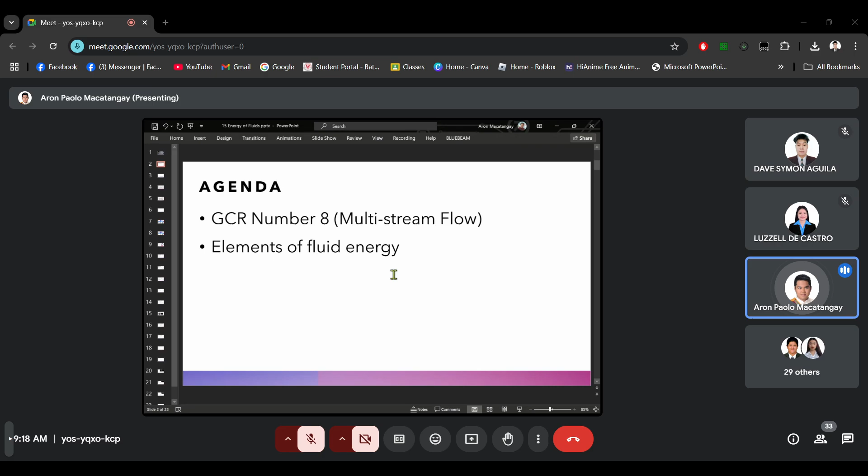So for now, GCR number 8, the multi-stream flow seat work, is one inlet, two outlets. It's a theoretical problem because, instead of a mixer, it acts as a separator. I have a fluid entering the chamber, then ideally the chamber will separate the fluid into two streams that have different properties. In reality, this is very difficult, almost impossible. But in theory, we just want to see how to solve problems of this style. I think in your quiz number 3, number 5, I asked you for feedback.

And one feedback that caught me is that they want to have examples that are the same level as exam questions. So this is one adjustment to that. I want to try giving you a little bit more advanced examples so that you can feel how to solve them and you will not get culture shock or exam shock when the final exam comes out, because they are relatively in the same level of difficulty. Okay,

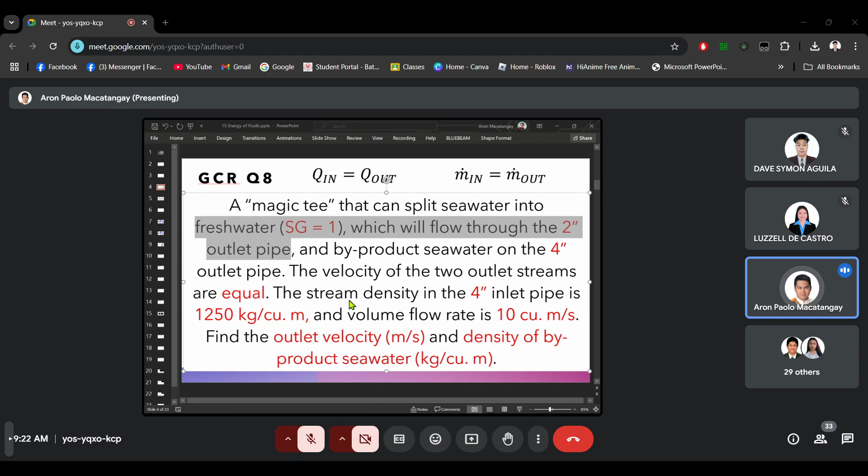And the problem states that the fresh water will flow through the 2-inch outlet pipe. It means that your fresh water will come to this side, to this end. So let us label this so you will not get confused. Fresh water. So the outlet pipes are 2-inch and 4-inch. The problem states that fresh water will come out of the 2-inch outlet.

It means that the other outlet pipe will release seawater also. But of course the density is different, because there is already a split in the fluid flow, so the properties of the two flows are different now. So there it is. Fresh water SG equals 1.

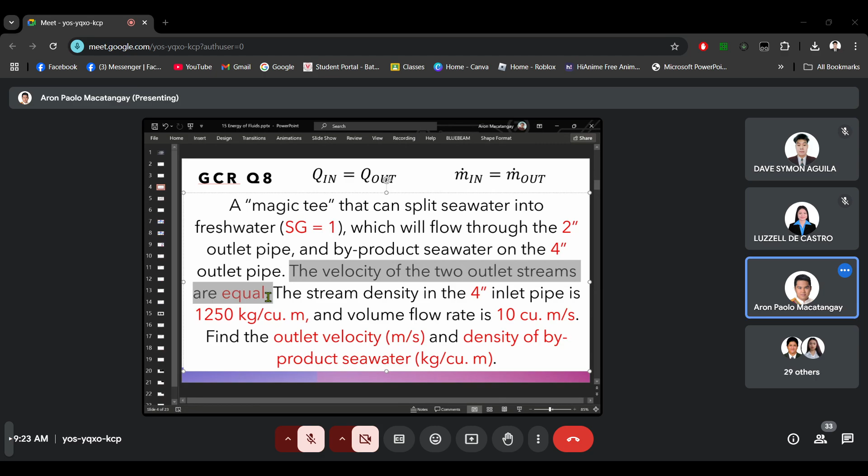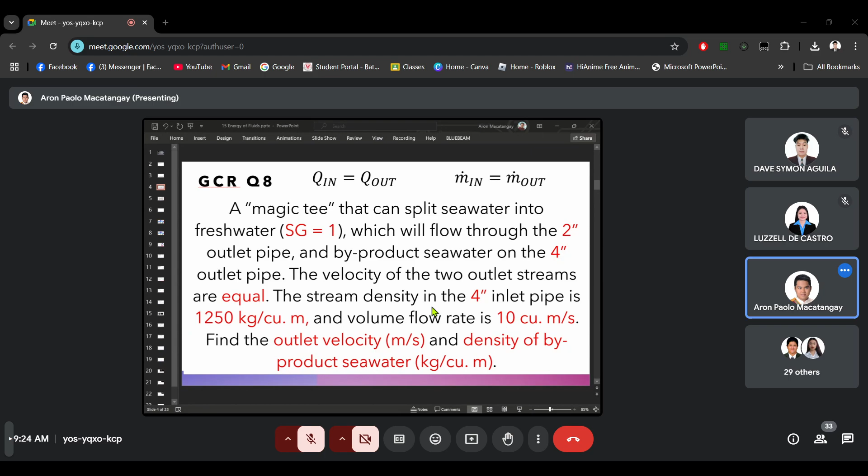And then it also stated that the velocity of the two outlet streams are equal. So V2 equals V3 is placed here to remind you that the velocity of outlet 2 and the velocity of outlet 3 are equal. You're asked to, let me copy this so you will remember. Find the outlet velocity in meters per second and the density of byproduct seawater, meaning the one coming out of T3, in kilogram per cubic meter.

So you can refer to the slides last week that are already uploaded on the classroom. And remember that the key here is the conservation of mass equations. Q in equals Q out and mass flow in equals mass flow out. This is Q, volume flow rate in equals volume flow rate out. Total.

So you have 15 minutes to do this seatwork to exercise your knowledge in multi-stream problems, because in the final exam most likely one problem will be a multi-stream problem. So I hope you get comfortable with solving problems like this.

So it's 9:26. I will have until 9:45 before we go on to the next topic, and then we will discuss the solution to this tomorrow during our face to face. If you have questions, then just raise your hand. I'll just be here in the background.

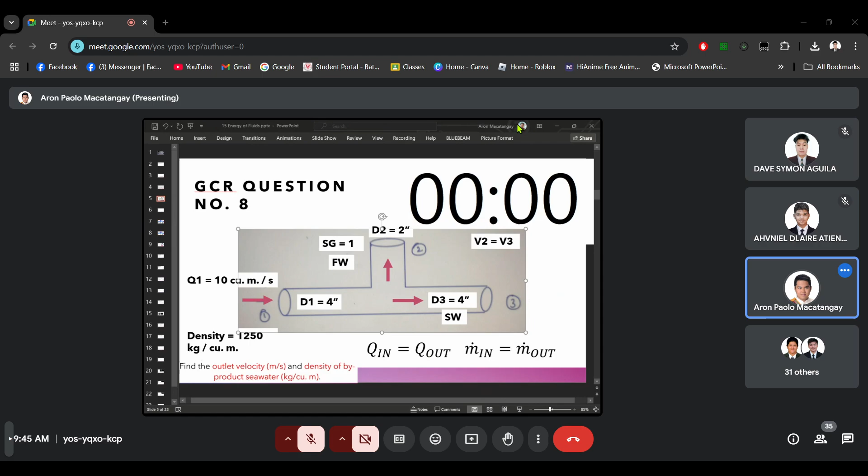The timer here is 0 already, but you can upload to the GCR until 9:45. Okay, so I think time's up. Hopefully most of you were able to solve that, but tomorrow we will discuss it in class, face-to-face. But for now, let's move on to our next topic, which is the energy of fluids.

Remember when we started the sem, I showed you this diagram, the different branches of fluid mechanics. First is fluid statics. That is your rho g h, everything rho g h. That was discussed from day one to midterms. And then I said that fluid kinematics and fluid dynamics will be discussed midterm onwards.

For the past two meetings, we discussed fluid kinematics, which is the study of fluids in motion considering geometry only. So this is your area times velocity, density times area times velocity, and density times gravity times area times velocity: your volume flow rate, mass flow rate, and weight flow rate. All of those consider geometry only and no consideration of energy.

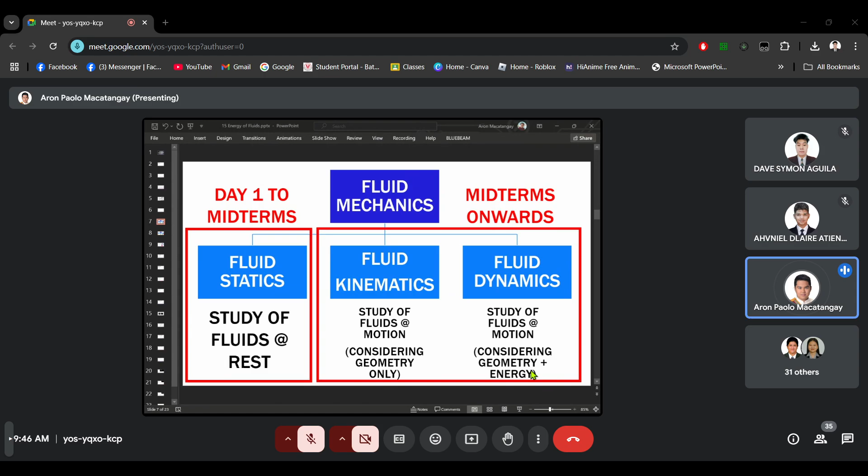Moving forward, we are now in the last category, which is fluid dynamics, the study of fluids in motion considering geometry plus energy. Theoretically, we are done with fluid statics and fluid kinematics. But tomorrow in our face-to-face, we will still discuss problems about fluid kinematics, more hands-on, seat work and group work, just to give you more examples.

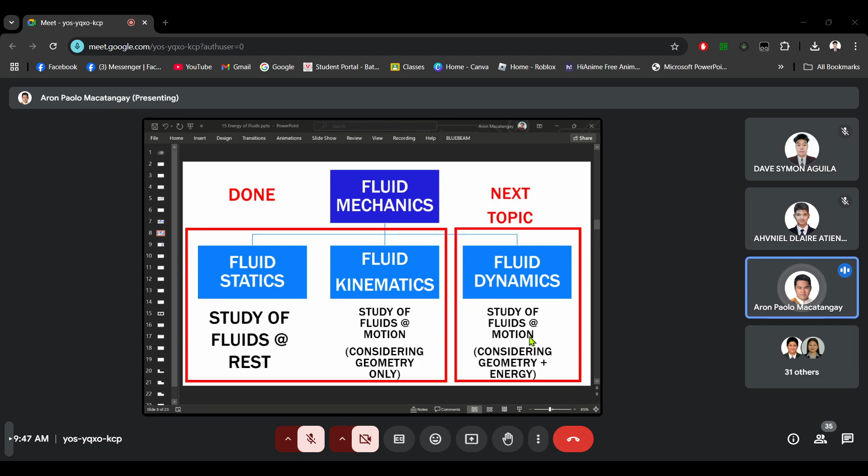But topic-wise, we're already on the last part, fluid dynamics. So we will now consider energy in our discussion of fluids in motion. Let's start with energy. Energy in fluid is in the form of mechanical energy, which can be converted to mechanical work completely. Mechanical work means you can use this energy to make objects move, so you can push or pull objects using fluid, or you can

make objects rotate. Next week we will discuss more of those types of machines and how fluids can convert energy to mechanical energy. But for today, we would like to focus more on the energy itself. What composes the energy of fluids?

The energy of fluids is composed of two types, the potential energy and the kinetic energy of the fluid. The potential energy involves the elevation energy and the pressure energy. These are potential because these energies are not due to moving particles. Elevation energy is based on elevation and pressure energy is based on pressure. These are properties of the fluid that do not necessarily mean it is flowing.

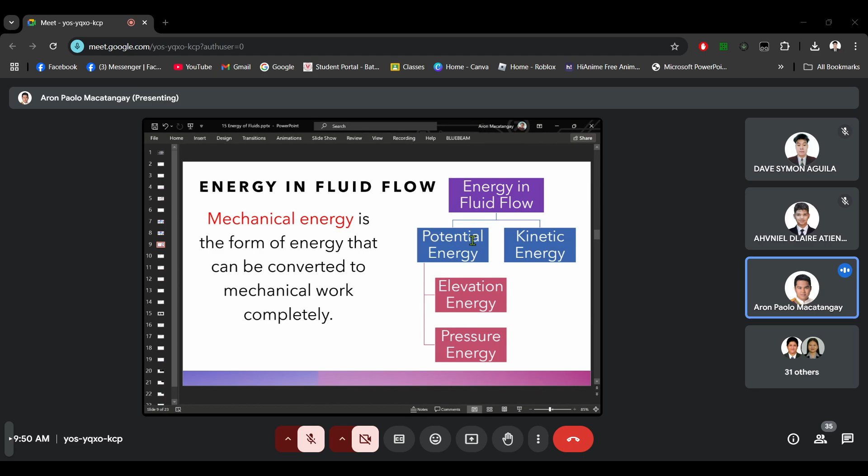Okay. So let's start with the potential energy part. The energy that is present in the fluid if it is in motion or even if it is not in motion. So the first component is the pressure energy. For fluids, this is the energy that has the ability to do work by virtue of the difference in pressure between 2 points. So remember, mechanical energy is related to actual motion, motion of machines, motion of parts. So pressure energy can actually cause mechanical parts to move because of the pressure.

Okay, so papaano yan? For example, if you have a sealed tank and you increase the pressure inside, you can actually cause the tank to explode. And that explosion will cause failure or damage to the physical material of the tank, and that damage is actually mechanical energy at work, because you can think that there is movement in the tank as it bursts open or as it becomes damaged.

It's also pressure in a balloon. If you have a small rubber balloon and you blow air into it, you increase the amount of air inside, you increase the force on the inside of the balloon that causes it to expand. And that expansion is actually movement already because of the pressure difference inside and outside the balloon. So the higher the pressure inside, the more push or force that the pressure is exerting on the balloon, causing it to expand. So that is due to pressure energy alone.

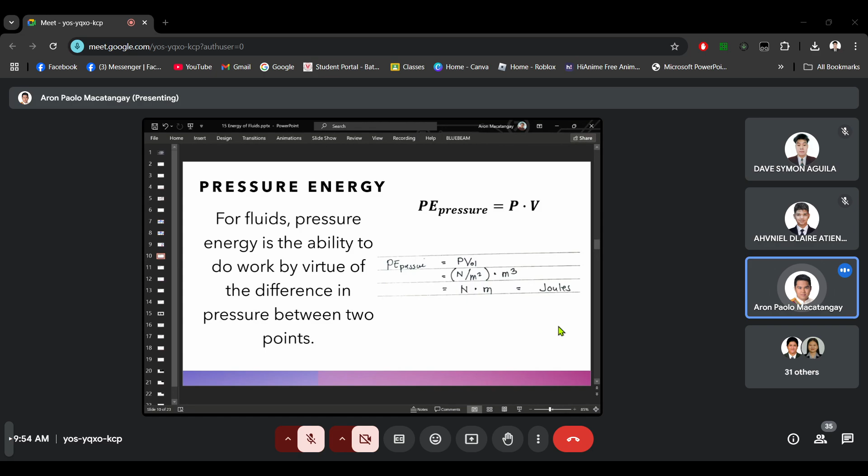Okay. Next naman, the kinetic energy. The kinetic energy is based on the fluid's ability to do work by virtue of its velocity. So yan yung pressure washer sa car wash. Well, may factor yung pressure, yes, because the higher the pressure, the stronger the water stream. But actually, what causes the stream to become powerful is the velocity. They're interrelated. The higher the pressure, the higher the velocity.

But the direct reason for the strength or the power of that pressure washer is the velocity. Because of the velocity of the water, you are able to get dirt from your tires or from your car or from your garage. If you pressure wash the floor of your garage, it's actually the velocity of the fluid that is doing the work.

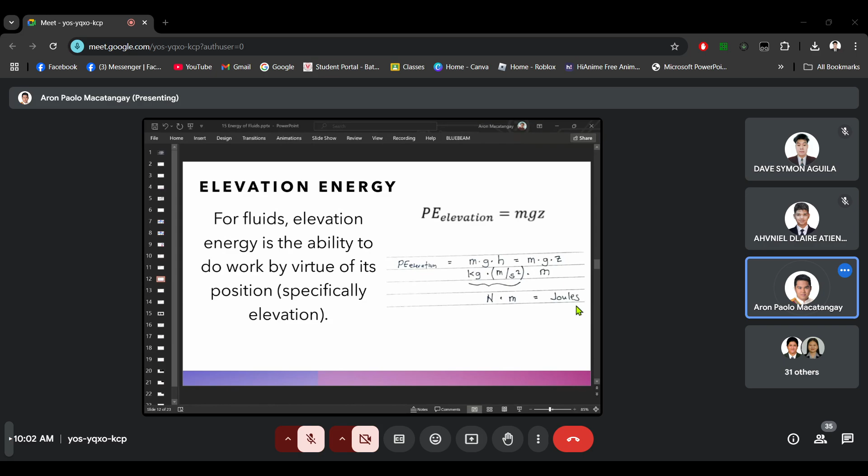So the total energy with these three elements is pressure times volume, PV, plus 1/2 mV squared, mass times velocity squared, plus mgz, mass times gravity times height. This is the total energy of a fluid. So what are the factors affecting the energy? Pressure, volume, mass, velocity, and height. All those factors contribute to the amount of energy in a fluid system. Any questions?

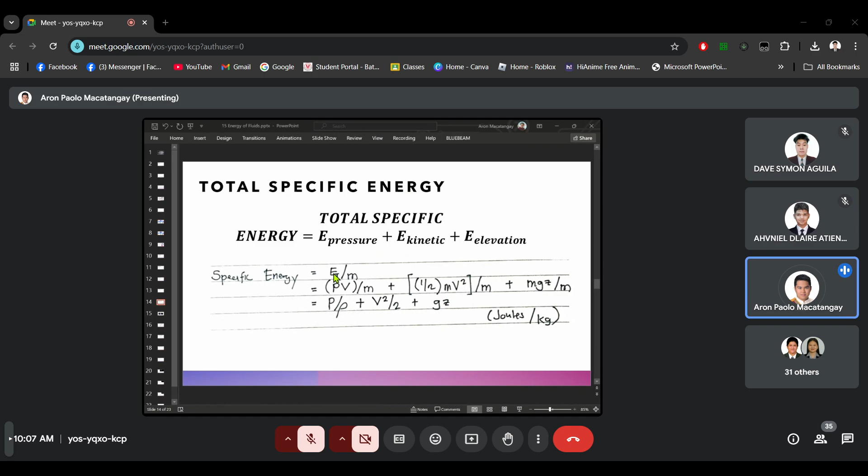And lastly, we have another form. If the total specific energy is total energy divided by mass, we have something called energy head, which is energy divided by weight. Weight is your mass times gravity, mg. So this is the energy per unit weight. Again, energy is Newton meter, weight is newtons, so they will cancel out. What you will be left with is meters only.

But even so, take note that this is not a unit of length. This is a unit of energy per unit weight, but it becomes meters because the newtons from the energy and the newtons from the weight cancelled out. So its unit is meters, but it is a unit of energy, which is called energy head. So do not get confused moving forward. Always label your values. Just because something is in meters does not mean it's the elevation. Sometimes even if it is in meters, it is actually the energy head already. Okay.

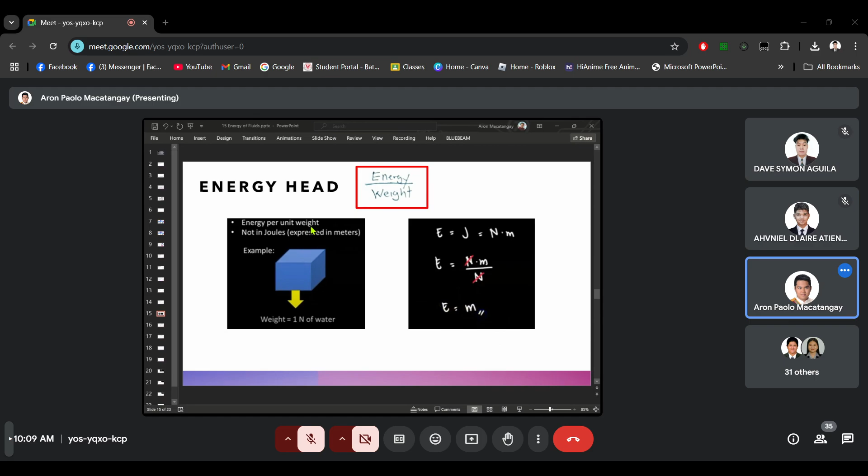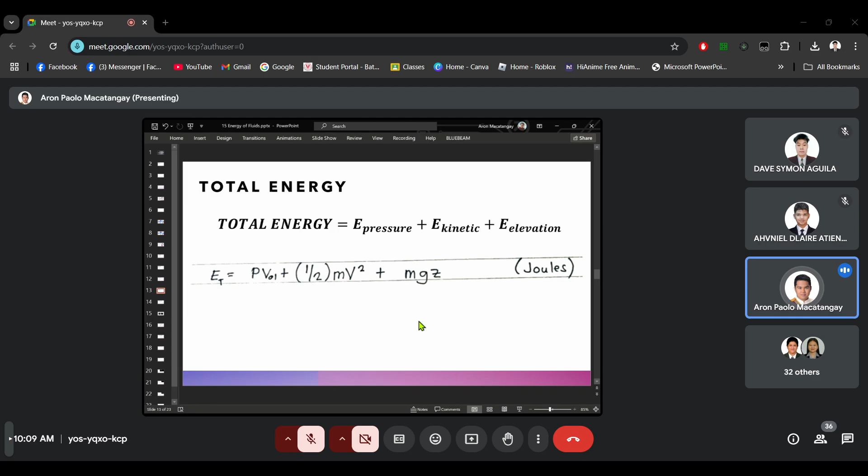So how do we derive? Similar to how we derive the specific energy. This is our original equation, total energy: PV plus 1/2 mv squared plus mgz. Then we say that the energy head is this equation divided by weight, which is given by mg. So per element, for the pressure head, that is PV, pressure times volume, divided by mg, the weight. V over M here becomes 1 over density. So it becomes P over rho g.

And remember, rho g is the specific weight, or weight density, in newtons per cubic meter. So dimensional analysis again. This is based on P over rho g. P is Newton per meter squared. Rho is kilogram per meter cubed. G is meters per second squared. The upper portion is still Newton per meter squared.

For the lower portion, we factor out the kilogram and the meters per second squared. Then we get kilogram times meter per second squared, and the 1 over meter cubed from the original density when it is separated from kilogram. So kilogram per meter cubed becomes kilogram times 1 over meter cubed, and then your meters per second squared. Kilogram times meter per second squared becomes Newton, multiplied by 1 over meter cubed, Newton per meter cubed. Then you get Newton per meter squared over Newton per meter cubed.

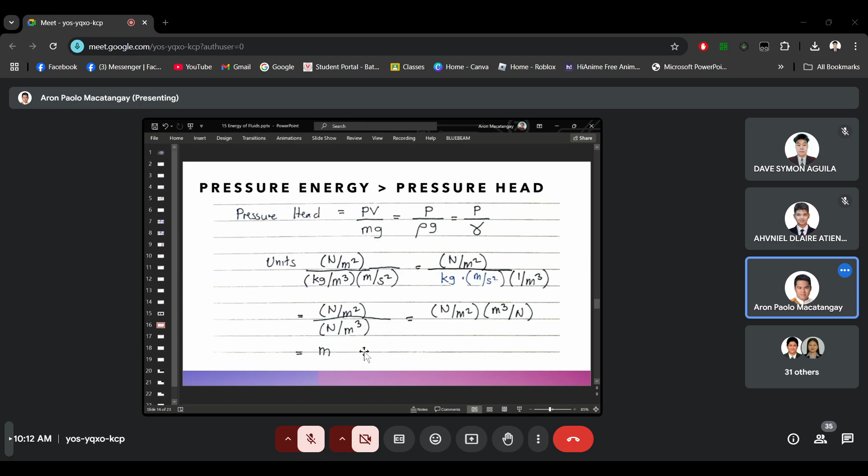Okay, next. Velocity head, same thing. One half mv squared divided by weight, or mg. So here, the m, the masses, will cancel out. So we will be left with v squared over 2, 2 from the one half, times g. V squared over 2g. Unit analysis: v is meters per second, g is meters per second squared. You will get meters squared per second squared over meters per second squared. The seconds will cancel. One of the meters will cancel. You will get meters also.

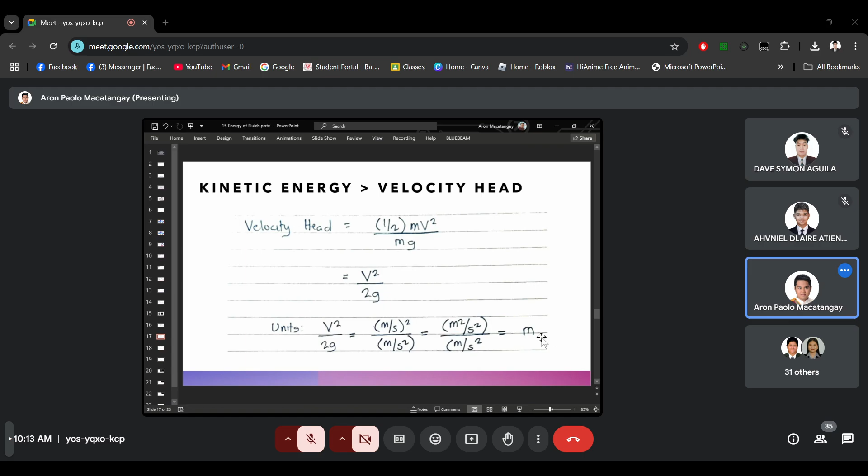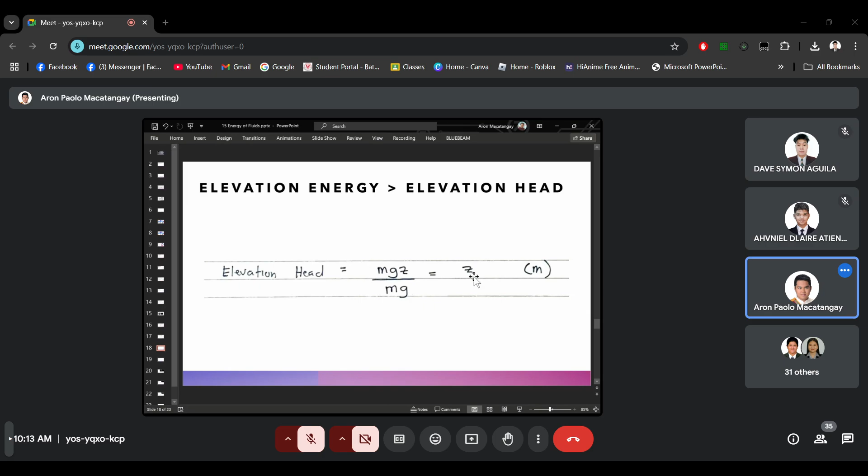And lastly, elevation head, mgz divided by weight, mgz over mg. The m and g will cancel out. So you will be just left with z, or elevation. Okay? So the total energy head now from the three terms will be P over rho g plus V squared over 2g plus z. Okay, so please be familiar with this one because this is what we will be using most of the time. The energy head, total energy head. So, okay, any questions?

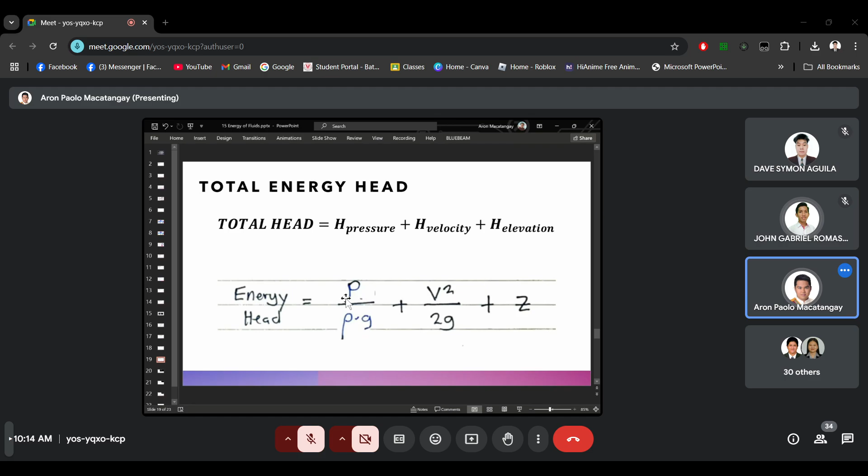So given this, remember, the energy of pressure is based on the pressure difference with respect to the outside or the ambient. Ambient, outside, atmospheric, basically. So what we will be using here for the pressure head, the P, is always the gauge pressure. Because if the pressure of the inside and the outside are the same, then there is no pressure difference. No pressure difference means no pressure energy. The P in the pressure energy element is always gauge pressure. It's always pressure difference. Okay.